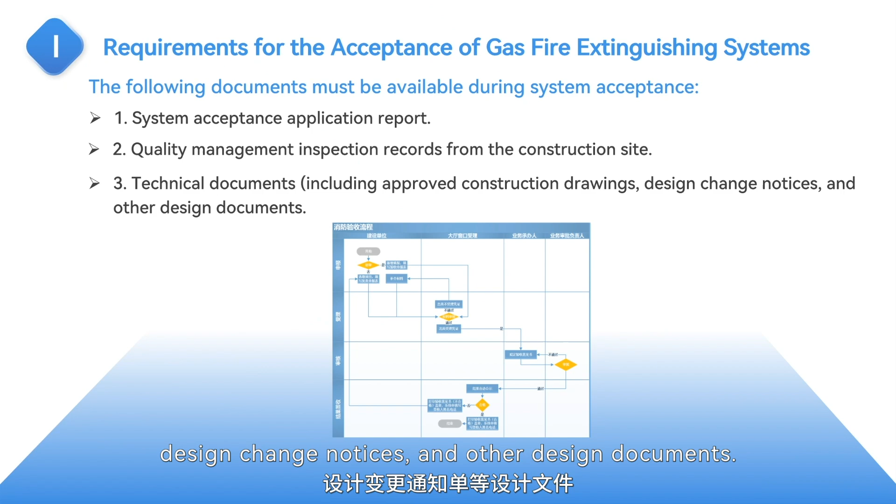The following documents must be available during system acceptance: 1. System acceptance application report. 2. Quality management inspection records from the construction site. 3. Technical documents, including approved construction drawings, design change notices, and other design documents.

Certificates of compliance for system components such as complete devices, fire suppressant storage containers, and container valves, as well as valid certification documents required by market access regulations, technical briefings provided by the design unit to the construction unit, and other relevant documents that need to be recorded or provided before and during construction.

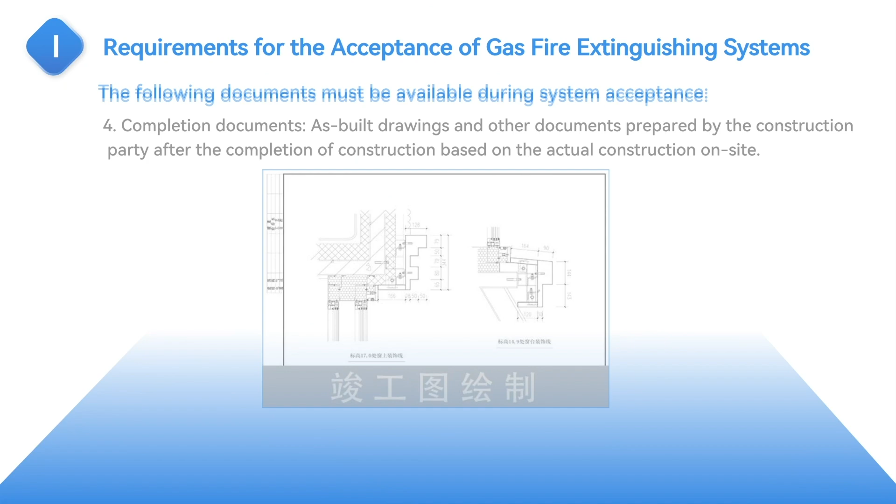4. Completion documents, as-built drawings and other documents prepared by the construction party after the completion of construction based on the actual construction on site. 5. Inspection records of the construction process. 6. Records of concealed work acceptance signed by relevant personnel such as supervising engineers.

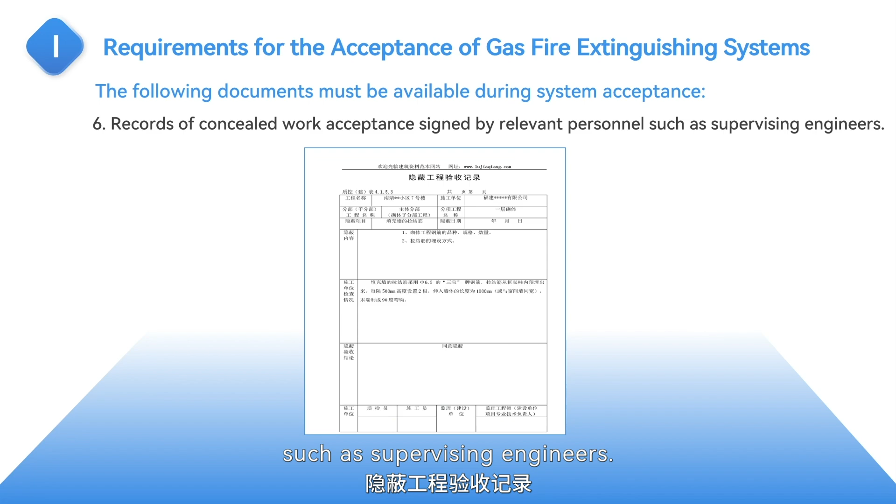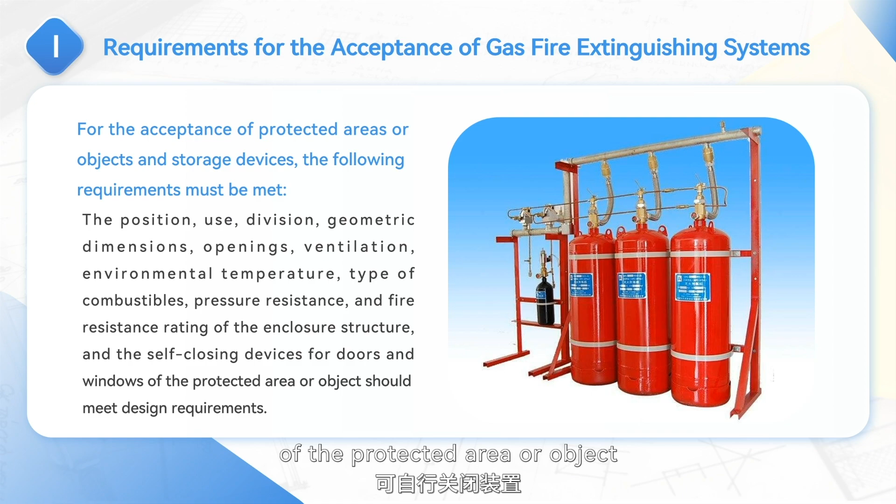For the acceptance of protected areas or objects and storage devices, the following requirements must be met. The position, use, division, geometric dimensions, openings, ventilation, environmental temperature, type of combustibles, pressure resistance, and fire resistance rating of the enclosure structure, and the self-closing devices for doors and windows of the protected area or object should meet design requirements. The safety facilities in the protected area should comply with the following requirements.

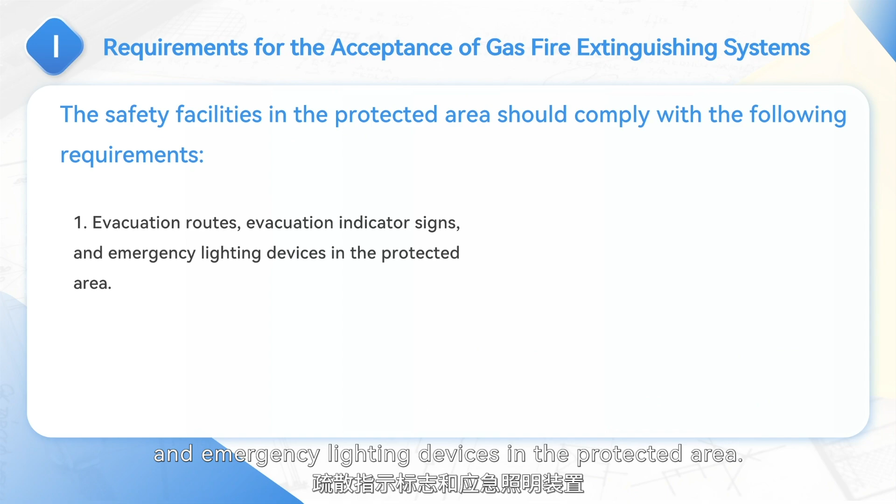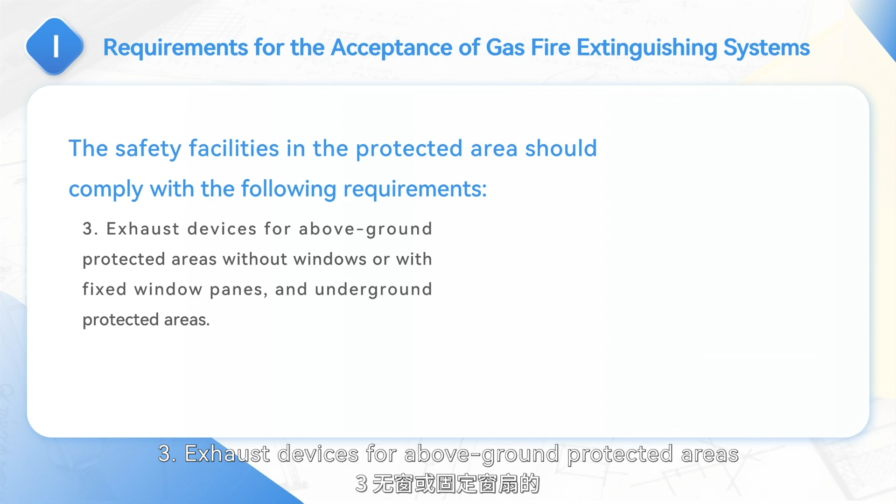1. Evacuation routes, evacuation indicator signs, and emergency lighting devices in the protected area. 2. Audible and visual alarm devices, gas discharge indicator lights, and safety signs at the entrance of the protected area. 3. Exhaust devices for above-ground protected areas without windows or with fixed window panes, and underground protected areas.

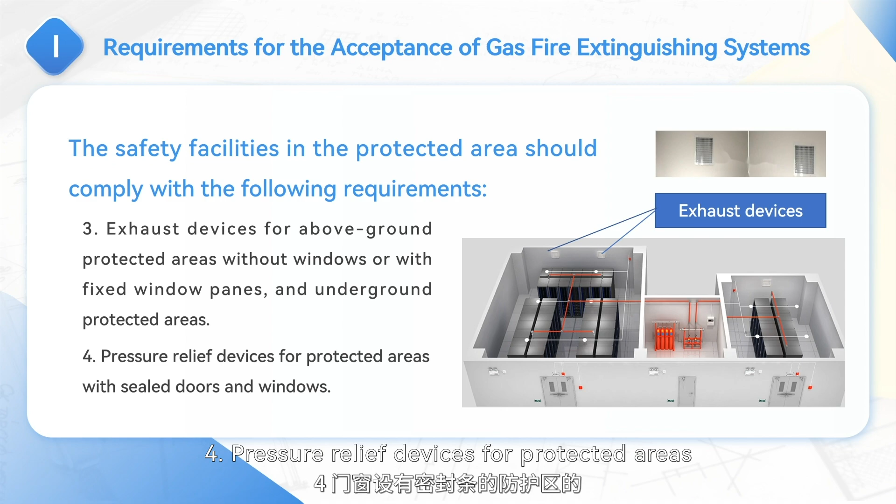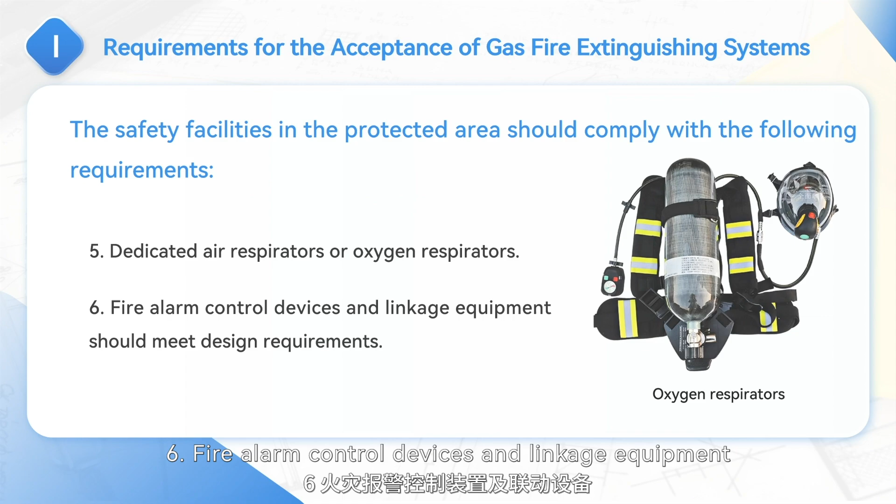4. Pressure relief devices for protected areas with sealed doors and windows. 5. Dedicated air respirators or oxygen respirators. 6. Fire alarm control devices and linkage equipment should meet design requirements.

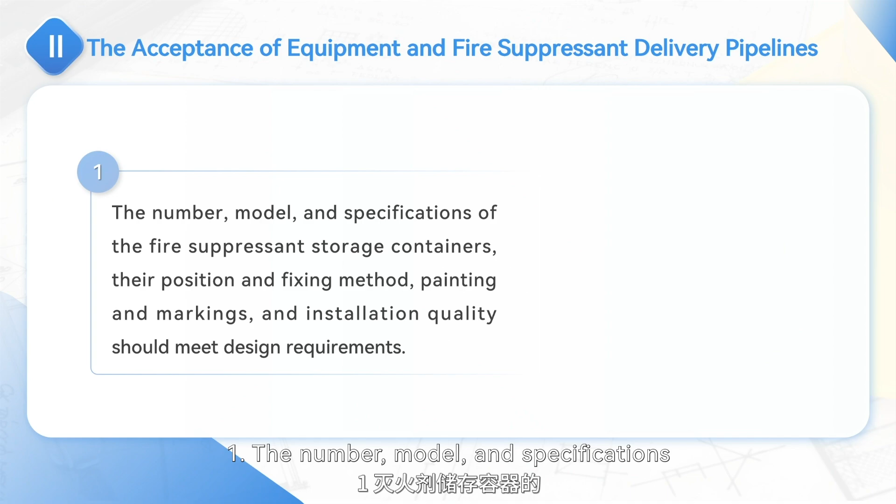For the acceptance of equipment and fire suppressant delivery pipelines, the following requirements must be met. 1. The number, model, and specifications of the fire suppressant storage containers, their position and fixing method, painting and markings, and installation quality should meet design requirements.

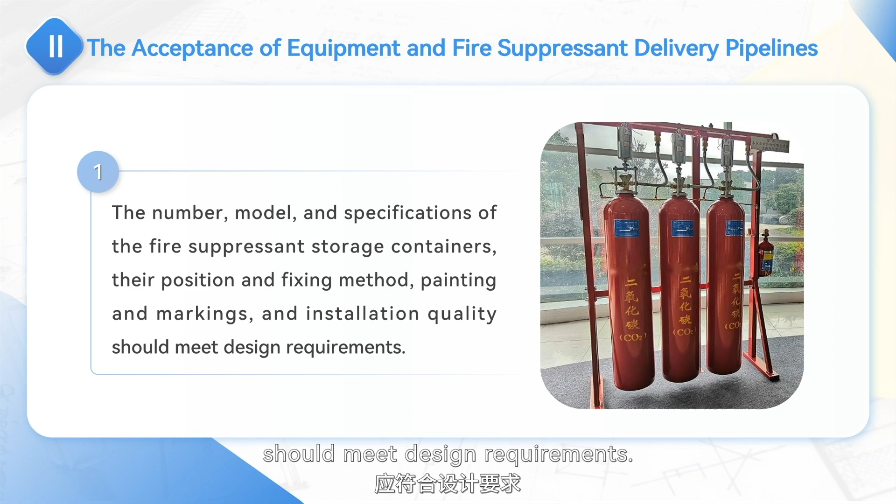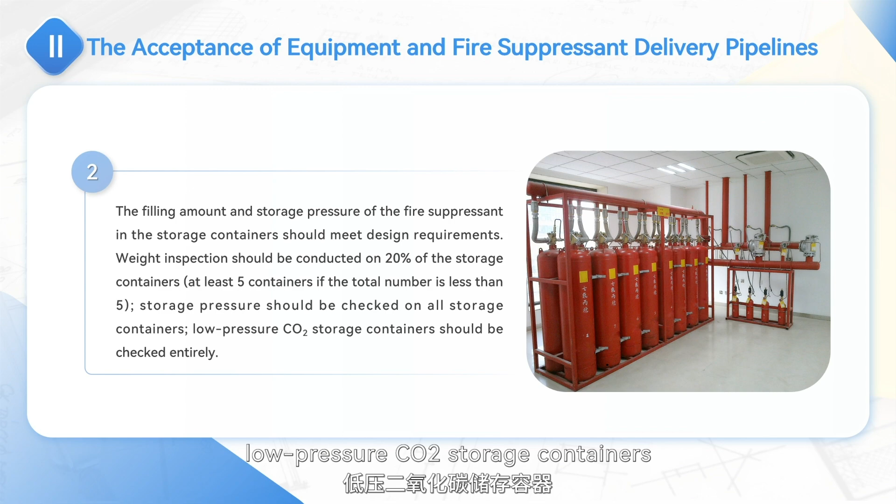2. The filling amount and storage pressure of the fire suppressant in the storage containers should meet design requirements. Weight inspection should be conducted on 20% of the storage containers, at least 5 containers if the total number is less than 5. Storage pressure should be checked on all storage containers. Low-pressure carbon dioxide storage containers should be checked entirely.

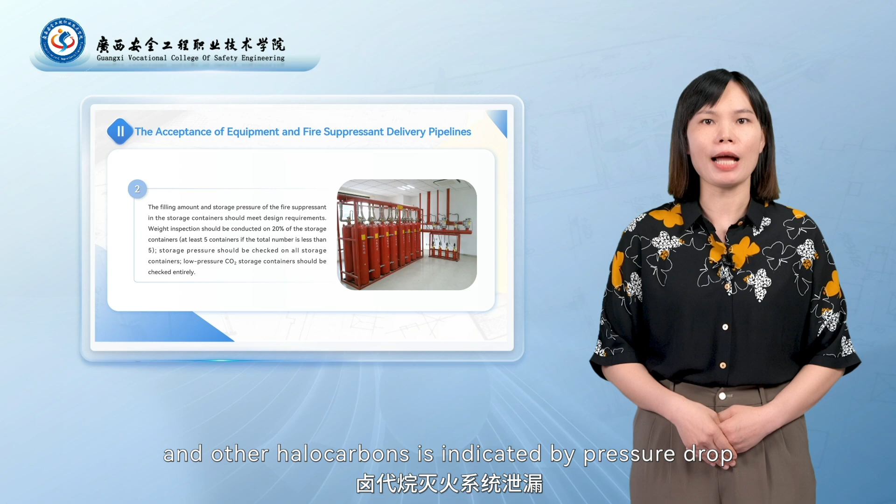Leakage in low-pressure carbon dioxide systems is indicated by a drop in liquid level and can be checked by a liquid level gauge. In high-pressure carbon dioxide systems, leakage is indicated by weight loss and can be checked by weighing. Leakage in systems using heptafluoropropane and other halocarbons is indicated by pressure drop and weight loss and can be checked by a pressure gauge and weighing.

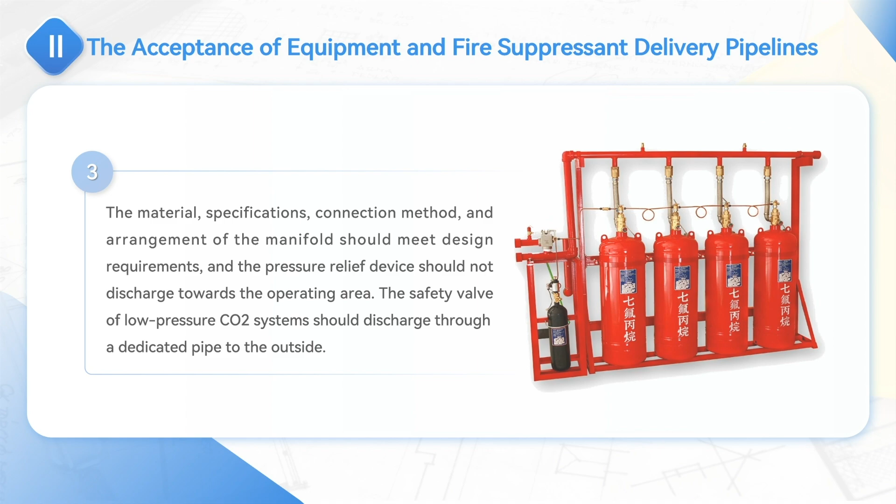3. The material, specifications, connection method, and arrangement of the manifold should meet design requirements, and the pressure relief device should not discharge towards the operating area. The safety valve of low-pressure carbon dioxide systems should discharge through a dedicated pipe to the outside.

4. The number, model, specifications, position, markings, and installation quality of selector valves and signal feedback devices should meet design requirements. The operating handle of the selector valve should be installed on the operating side, and if installed higher than 1.7 meters, measures should be taken to facilitate operation.

The flow direction indication arrow on the selector valve should point in the direction of medium flow, and a permanent nameplate indicating the name or number of the protected area or object should be attached and easily visible.

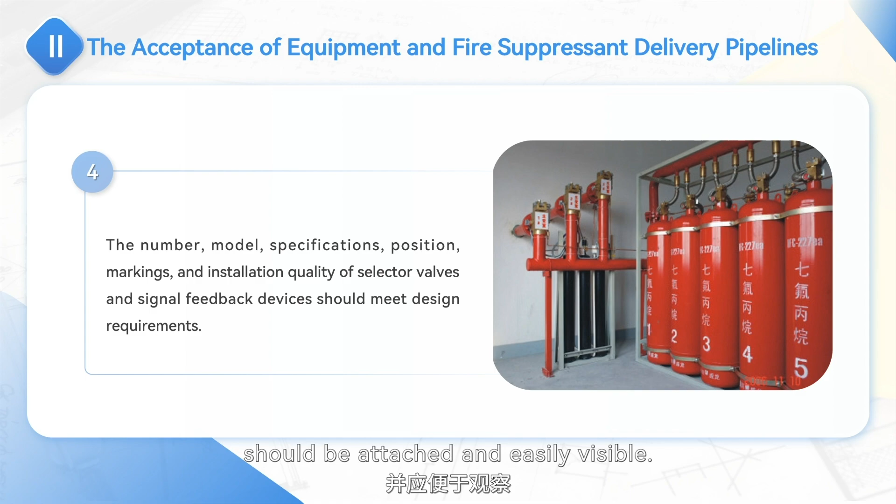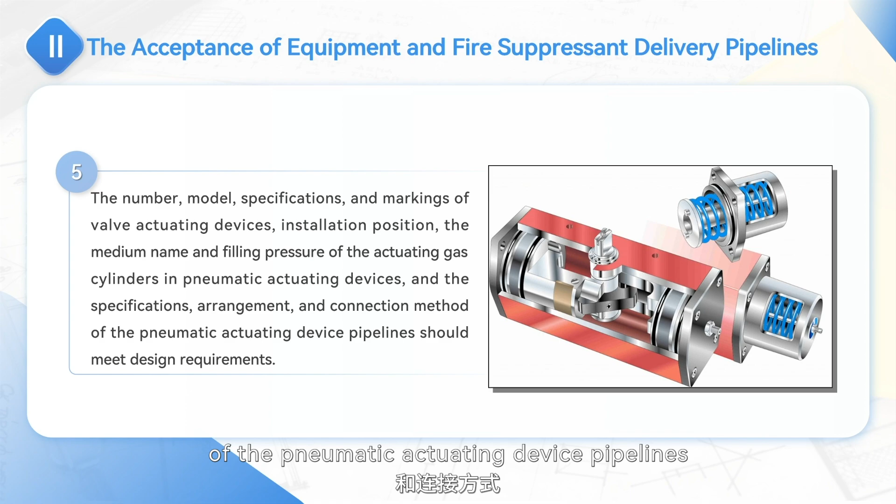5. The number, model, specifications, and markings of valve actuating devices, installation position, the medium name and filling pressure of the actuating gas cylinders in pneumatic actuating devices, and the specifications, arrangement, and connection method of the pneumatic actuating device pipelines should meet design requirements.

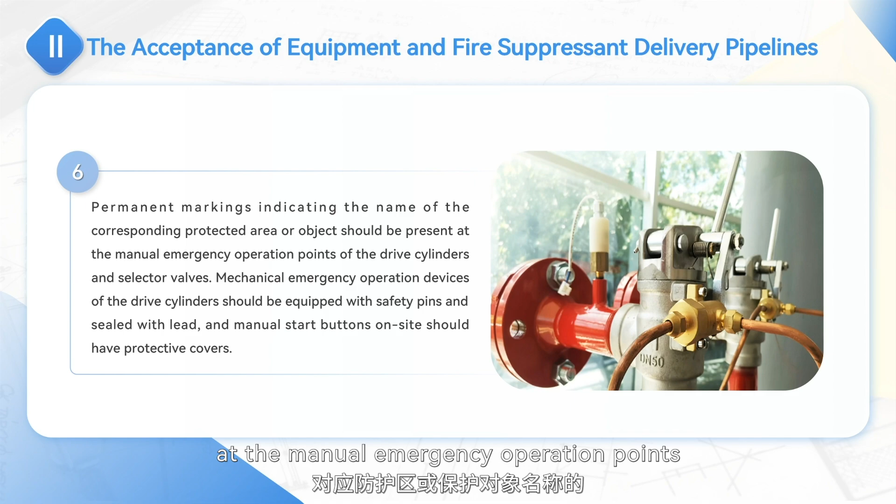6. Permanent markings indicating the name of the corresponding protected area or object should be present at the manual emergency operation points of the drive cylinders and selector valves. Mechanical emergency operation devices of the drive cylinders should be equipped with safety pins and sealed with lead, and manual start buttons on site should have protective covers.

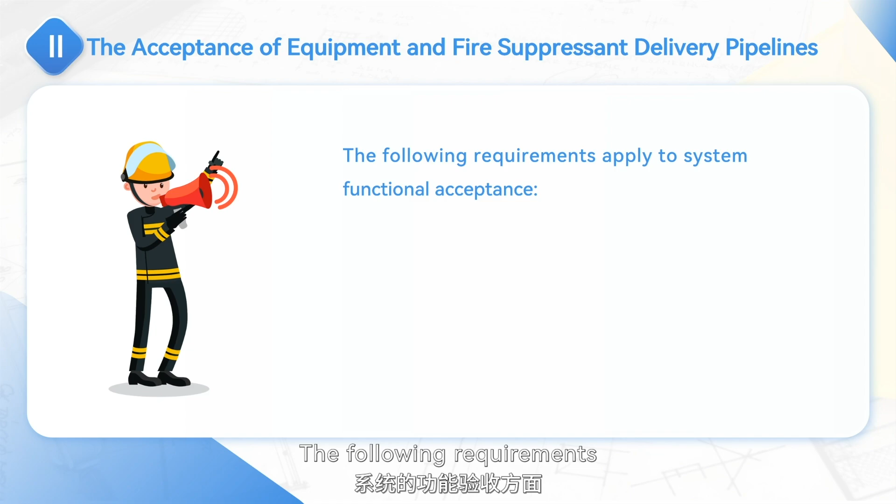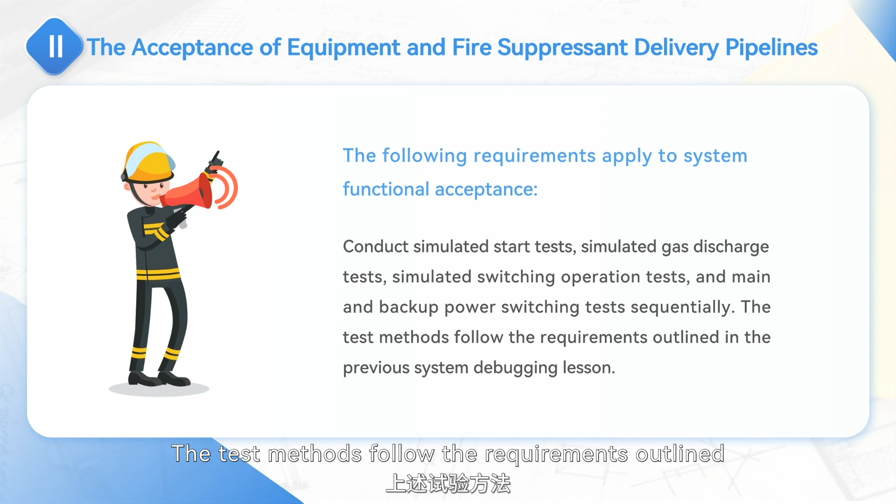The following requirements apply to system functional acceptance: conduct simulated start tests, simulated gas discharge tests, simulated switching operation tests, and main and backup power switching tests sequentially. The test methods follow the requirements outlined in the previous system debugging lesson.

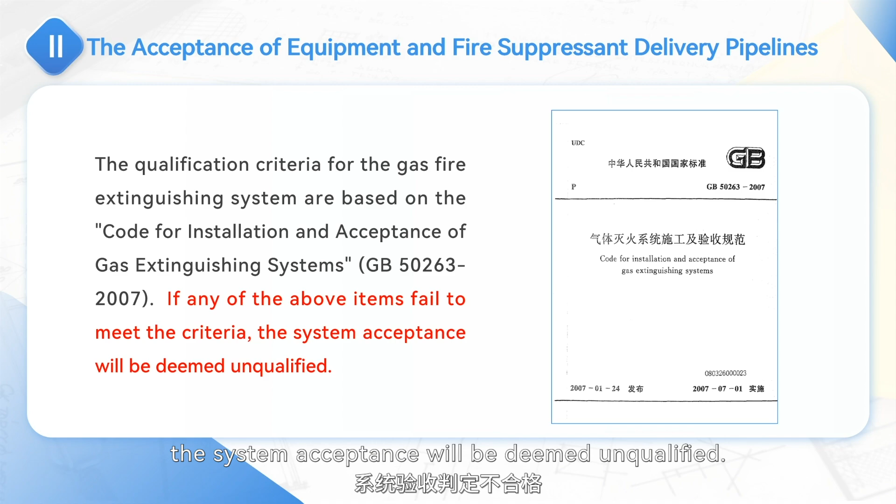The qualification criteria for the gas fire extinguishing system are based on the Code for installation and acceptance of gas extinguishing systems, GB 50263-2007. If any of the above items fail to meet the criteria, the system acceptance will be deemed unqualified.

Alright, in this lesson, we learned the requirements for the acceptance of gas fire extinguishing systems, the acceptance process, and the necessary related materials. We focused on the acceptance requirements for protected areas, storage devices, equipment, and fire suppressant delivery pipelines, as well as the functional acceptance of the system. We emphasized the qualification criteria for gas fire extinguishing systems.